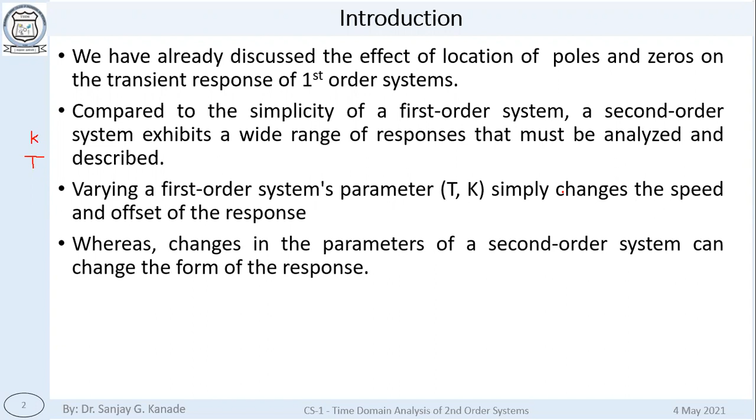But in case of second order system, it is much more complicated, and based on the values of those components of the second order system, it can exhibit a wide range of responses, and those need to be analyzed, and we are going to analyze those different types of responses. Okay. So this is basically what I have written on this slide, whatever I told you right now. Okay. So

sometimes you may find that even if the system is second order system, its output or the response looks like a first order system. Now that is dependent on, again, some of the values of the second order system, and those are some characteristic specialties of second order system, that the output may look like a first order system or some different type of output we may get from a second order system. Now

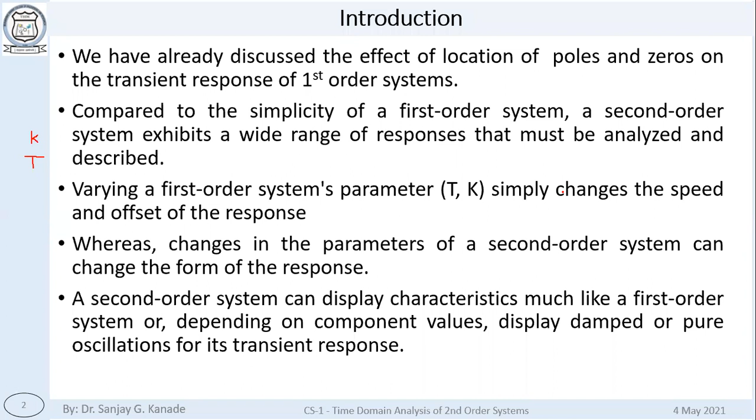tell me the transfer function or the equation of a second order system, then you should immediately tell this equation within fraction of seconds. Omega n square upon s square plus 2 zeta omega n s plus omega n square. Like this, you should be able to tell this equation immediately. Okay, omega n square upon s square plus 2 zeta omega n s plus omega n square. So this is the most important equation in the classical control system theory subject, control system 1. And you must remember this equation forever.

This will be required for your next year subject also. When you see control system 2, at that time also you will have to take cognizance of this equation. So don't think that this is the subject, once you pass it will be over. No, it is going to play a major role in all the system design calculations that you are going to perform. Okay. Now, can someone derive this equation from here?

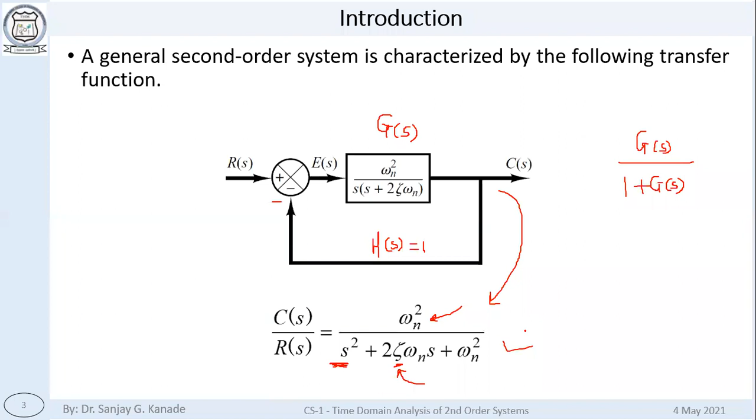Now, what are these omega n and zeta? S is obviously the Laplace domain variable, so that is not a question. There are two parameters in this equation. The first one is zeta and the second one is omega n. Omega n is the undamped natural frequency of the second order system, which is the frequency of oscillation of the system without damping.

Now, some of these things you may have studied in physics, about the natural frequency of oscillation. For example, you give a guitar string some vibrations and it will vibrate at a particular frequency. That is its natural frequency. And if you apply your fingers, you are damping it. So omega n is that undamped natural frequency of the second order system.

And the second parameter in the equation is zeta, which is called the damping ratio or damping factor of the second order system. It is the measure of degree of resistance to the change in the system output. These two values are going to play an important role in looking at the response of the second order system.

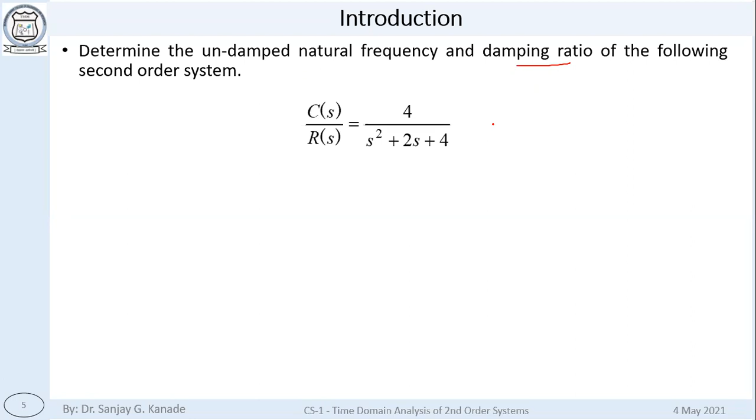Now, just for an example, we want to find out the undamped natural frequency and damping ratio. This example looks very simple, and it has already been asked in some question papers. Some of you may think why such a simple question is asked, but many students make mistakes while finding these values. Can you find out? You just have to compare the given equation with the standard equation. Now, how are you going to find it?

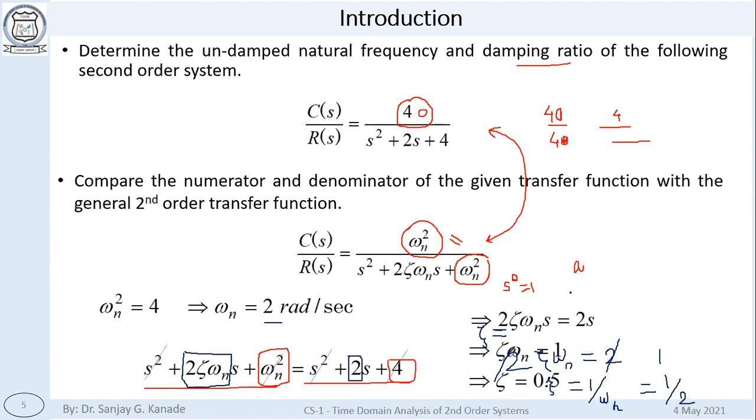So zeta omega n is equal to 1, and zeta is equal to 1 by omega n. And omega n is what? Omega n we have found out is equal to 2. So zeta is equal to 1 by 2. Okay, so you are right, Pramod. Zeta is equal to 1 by 2, so zeta is equal to 0.5. This is how you find out the values of omega n and zeta. Now where are the 2 poles? The system is a second order system, which means there are 2 poles in the system.

So how do we find out the poles of the system? This is the characteristic equation or the denominator polynomial. You just find out its roots. This is a second order system. So what is the formula for finding out roots of a second order polynomial? What is the formula for second order? Yes, anyone?

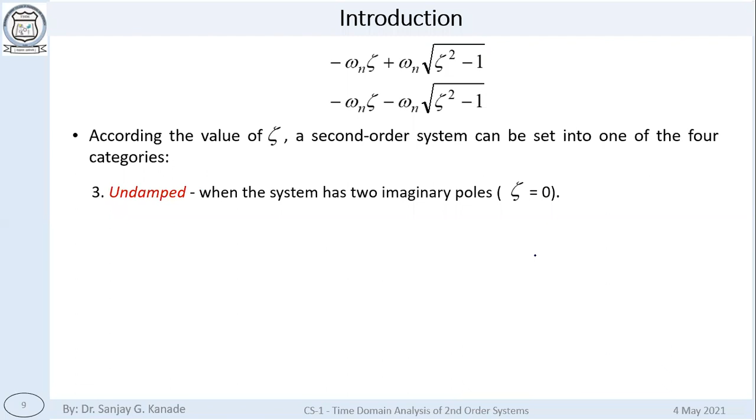Third category is undamped, when zeta is equal to 0. Now what is happening here? If zeta is 0, the real part is 0, right? Because this is omega n into zeta, so that is 0. So what remains is only plus or minus omega n, and the square root has only -1. Means two imaginary poles we will get, and those are on the imaginary axis. The two poles are on the imaginary axis when zeta is equal to 0.

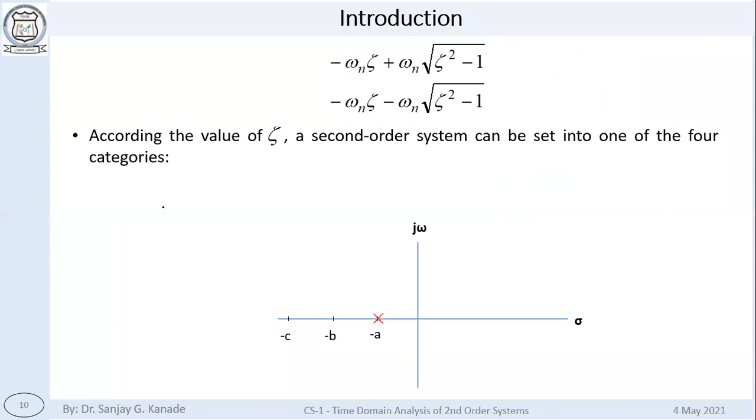And the fourth possibility is when zeta is equal to 1. What happens? When zeta is equal to 1, this becomes 0. Means only the real part remains, and that too equal. So there are two poles. Both are real and equal.

So repeated poles. So you can see here I have put two crosses here, quite overlapping crosses. And this kind of system is called a critically damped system. Critically damped system. Okay. So we will now stop here.

What we have seen today is there are 4 categories in which a second order system will be categorized based on the value of zeta. Okay. When zeta is equal to 1, critically damped. When zeta is equal to 0, undamped.

Okay, so let's resume our discussion on time domain analysis on second order systems. The second order system is the one where there are 2 poles, right? That we already know now. There are 2 poles in the system, and the general formula for the poles we have derived as this one. What is it based on? It is based on the general equation of the second order system.

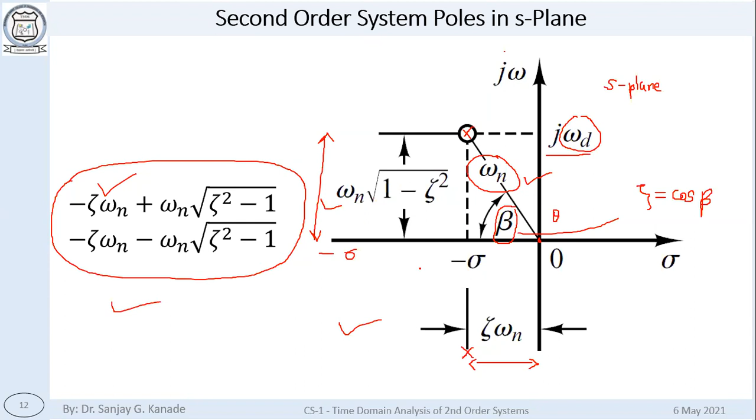Okay. Now, as we did for the first order system, we want to find out the step response of the second order system also. And in that, we are going to focus particularly on the underdamped system, because the underdamped system exhibits certain specific characteristics which are not possible to analyze for the other three types.

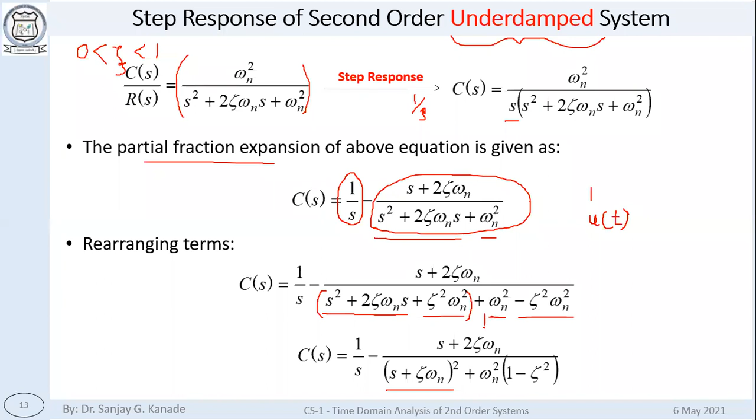This bracket becomes s plus zeta omega n squared plus omega n square taken common, and from here remains 1 minus zeta square. Okay. So this expression I have written again here. Okay. Now what? Now I am again writing instead of this expression, just to simplify my calculations a little bit, I have taken omega d.

This is actually not some randomly taken term. This is called damped natural frequency. Omega d is equal to omega n square root of 1 minus zeta square. Okay, this is called damped natural frequency. Now in our previous lecture we have seen zeta is equal to 0. What is that system called? It is called undamped, right? This is called undamped system.

So if you substitute here zeta is equal to 0, what we will get? Omega d will be in this case equal to omega n. Means what? We will get the undamped natural frequency. So it is the same thing now. You can relate this now. Why we call this undamped system? When zeta is equal to 0, we call that undamped system.

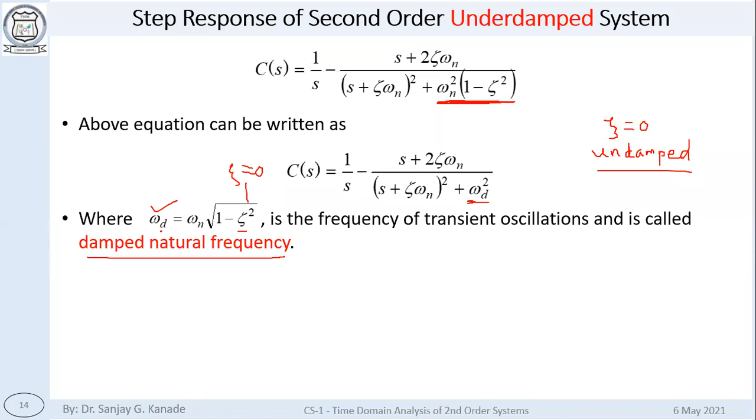Okay. So here it is. With zeta having some value, we get omega d, which is damped natural frequency, and its value is equal to omega n square root 1 minus zeta square. Now, for the inverse Laplace transform, we can in this case split this term.

You can see here it was 2 zeta omega n. So I have taken 1 zeta omega n here and 1 zeta omega n here. Okay, nothing extravagant. It is quite simple that I have done here. S plus zeta omega n

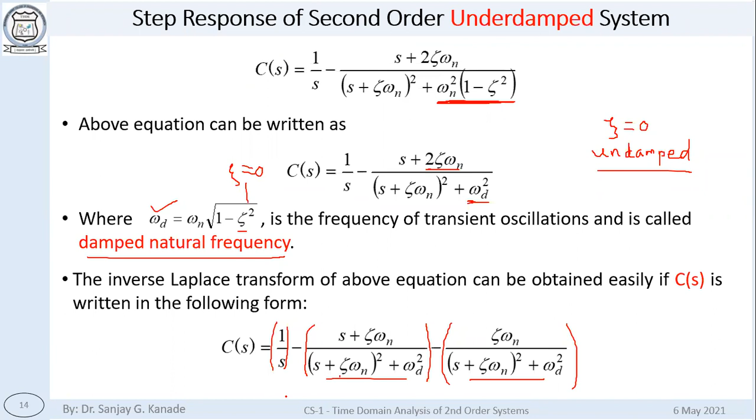Denominator is same for both the terms. Now here you can see that this expression as well as this first expression, all these three are now in some form of Laplace transform pairs. There are certain forms which we can now use for Laplace transform inversing. Which formula we can use? I will come to that a little later. Just a little more rearrangement is required for the same thing.

And now we have exactly some expressions where we have Laplace transform pairs. Which pairs? You can go through this slide which I have shared with you in the morning also.

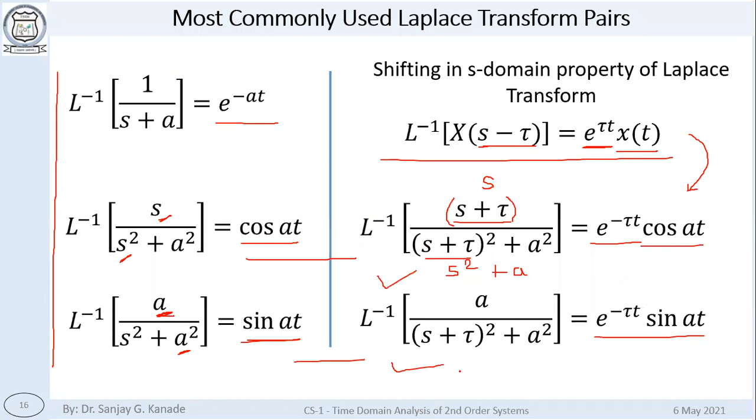Now you can see that these terms 1 and 2 are the terms we have in our equation. S plus zeta omega n upon (s plus zeta omega n) squared plus omega d squared. So here we are going to get a cos term. Cos of what? Cos of at. What is a in this case? Omega d. And because of this shifting it will get multiplied by e raised to minus zeta omega n t.

So this is what we get now: e raised to minus zeta omega n t cos of omega d t, and similarly for sine also. So we have got our expression for step response of second order underdamped system. From both these terms we can take this common. This makes things a little bit easier, not really necessary. And again the special case, zeta equal to 0 means an undamped system. So what will happen to this whole term? Zeta is equal to 0, so this term becomes 1.

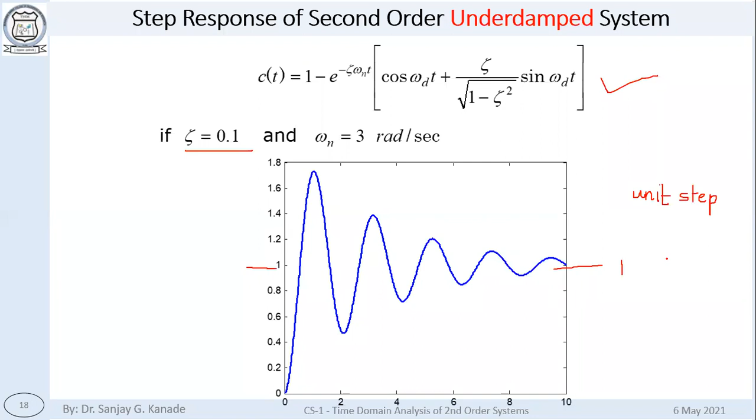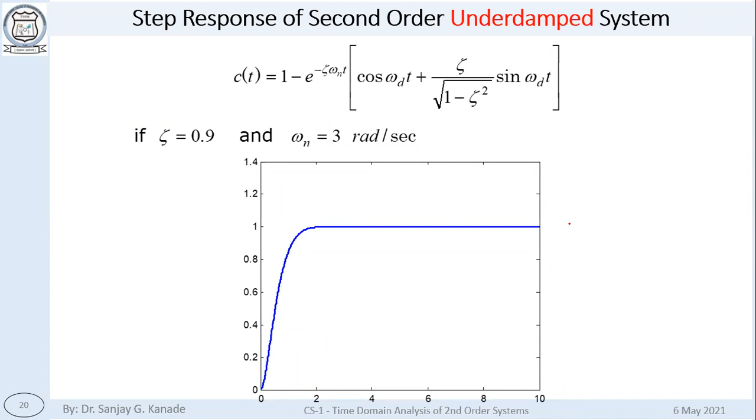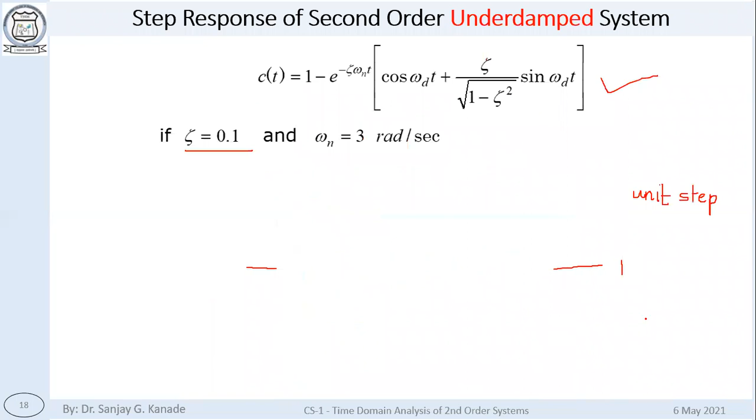There is no damping, no reduction in oscillations. The oscillations will continue forever, just like that. The oscillations are not going to decrease. Why so? Because you have seen the expression also. See, what was the expression for zeta is equal to 0? See here, 1 minus cos omega n t.

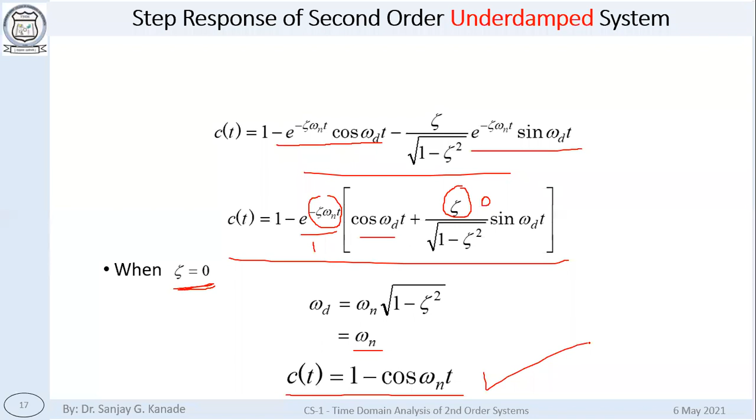So it is a pure sinusoidal wave, 1 minus cos omega n t. There is no decaying factor there, right? 1 minus cos omega n t. It is a pure sinusoidal wave. That's why we get the output as pure sinusoidal when zeta is equal to 0.

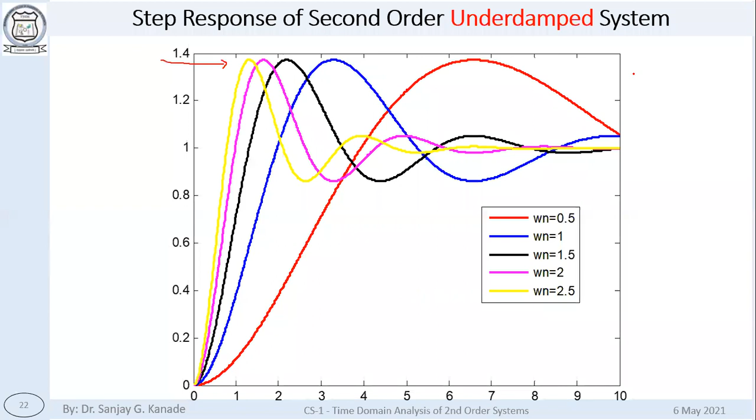If we keep zeta constant and we change only the frequency, then what happens? You can see the overshoots are the same, the highest values of the response are same. What has changed is the frequency, because we are changing frequency basically, so we can see that the frequency has now changed. What do you mean by frequency?

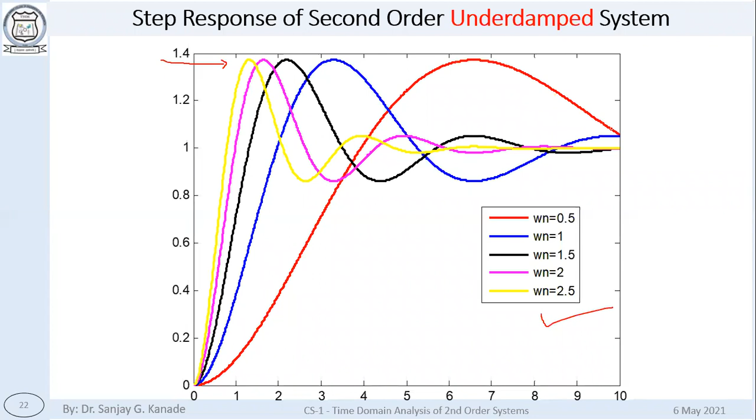This time period of the signal wave changes means frequency is changing. The time period is increasing means frequency is decreasing. Okay,

now we are going to move to one of the most important topics again, the time domain specifications. If you have any questions, you can raise them, by the way. There are a lot of things you have to pay attention to. Again, this diagram is very important, and this question has been asked a lot of times in your exams, so I suggest that you draw this diagram in your notebook and keep it with you all the time.

So whenever we talk about the time domain specifications, we always take a unit step input and give it to a second order system, and for such a system zeta is between 0 and 1, meaning it is an underdamped system. Omega n is greater than 0, meaning the frequency is greater than 0, and for that, as we saw in some of our earlier slides, the response is in this manner.

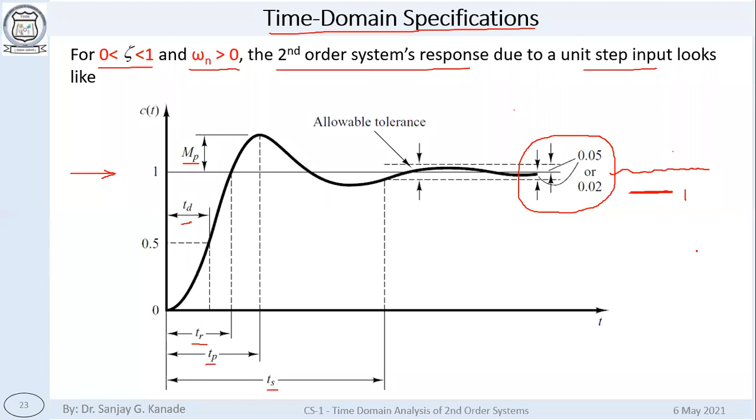So the first term is TD. TD is called delay time. Now what could it be? It is the delay, how much delay there is, right? The definition of delay time is the time required for the response to reach half of the final value for the very first time.

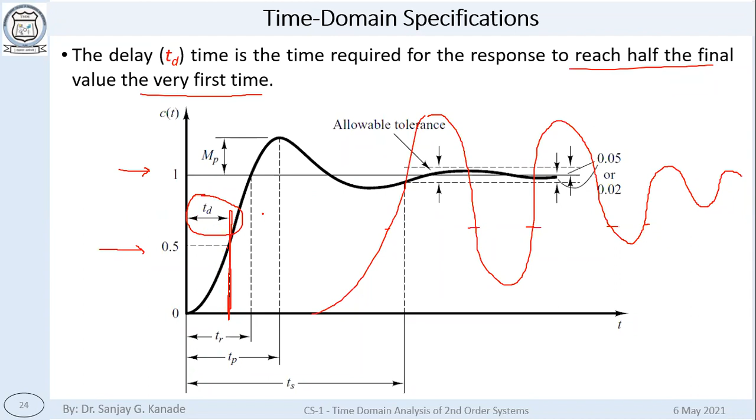Now the next time domain specification is rise time. The rise time is the time required for the response to rise from 10% to 90%, or 5% to 95%, or 0 to 100% of its value. For an underdamped system, 0 to 100% rise time is taken. For an overdamped system, 10 to 90% rise time is commonly used. Since we are talking about the diagram for an underdamped system,

rise time here is the time required for the response to rise from 0 to 100% of the final value for the first time. Again, only when it reaches for the first time. So this is TR, rise time. The 100% value is here.

Then the next time domain specification is peak time. Peak time is the time required for the response to reach the first peak of the overshoot. Again, first peak. As in the diagram I just showed, there can be multiple peaks. What is a peak? The tip, the higher values. So there can be multiple peaks. So which one do we have to take for peak time?

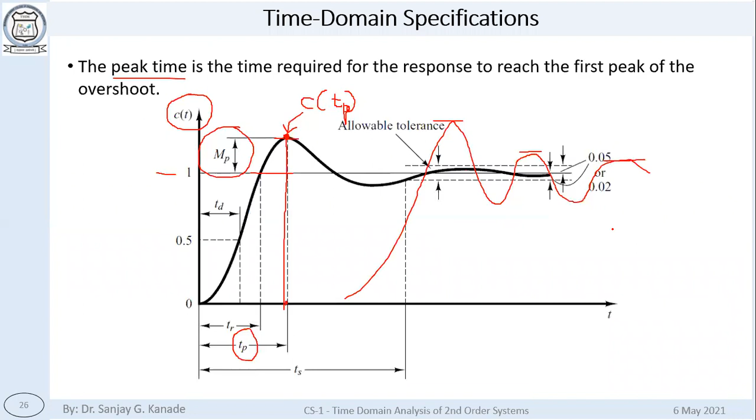This overshoot is particularly important for talking about the stability of the system. Okay. So I hope all of you have noted down these definitions of time domain specifications: tr, td, tp, Mp, and ts. ts is what? The settling time. It is the time required for the system to reach within the allowable tolerance and remain there.

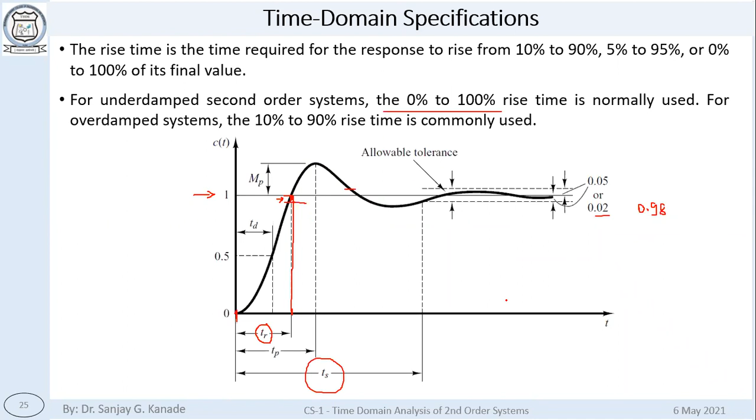But this is not the time, because from here it has gone up, then again gone down like this. So we don't want that. What we want is that the response goes and remains in the allowable tolerance. Only then we call it the settling time. Okay. So these are the time domain specifications.

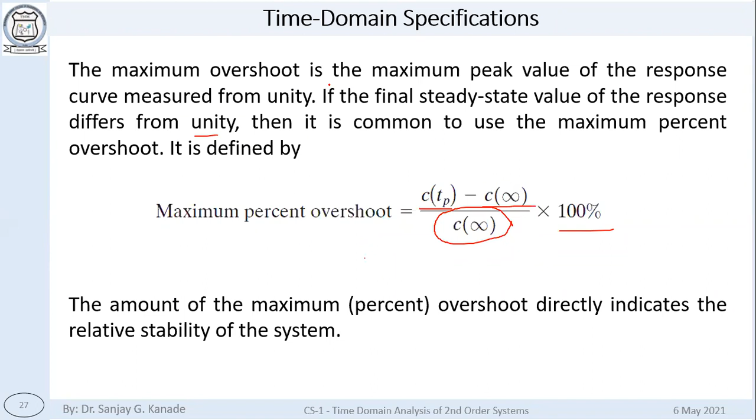Okay. Any questions regarding what we have seen today? We have seen two most important things today: the derivation of the step response of the second order underdamped system, and the time domain specifications. Both these topics are extremely important from a university question point of view. Direct questions are asked. Many of the questions are based on that. So you must keep this with you all the time. Okay.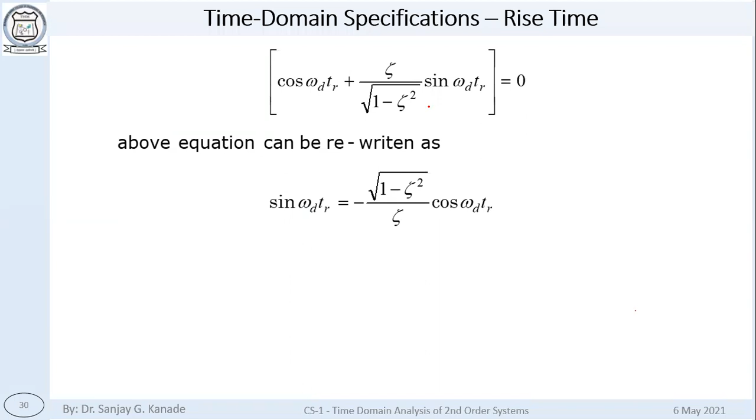Here sine omega d tr is equal to minus, this goes on that side, square root of 1 minus zeta square upon zeta cos omega d tr. And then if we can see, tan omega d tr is equal to minus square root of 1 minus zeta square upon zeta. Okay.

Tan inverse of this term is actually pi minus theta, where theta is equal to this angle. Okay, and how will you calculate the value of theta in general? I told you that zeta is equal to cos of theta, so theta will be cos inverse of zeta. So that's how we can calculate the value of theta, and from there we can calculate the value of tr. So this is the expression now for tr, which is the rise time of the second order underdamped system.

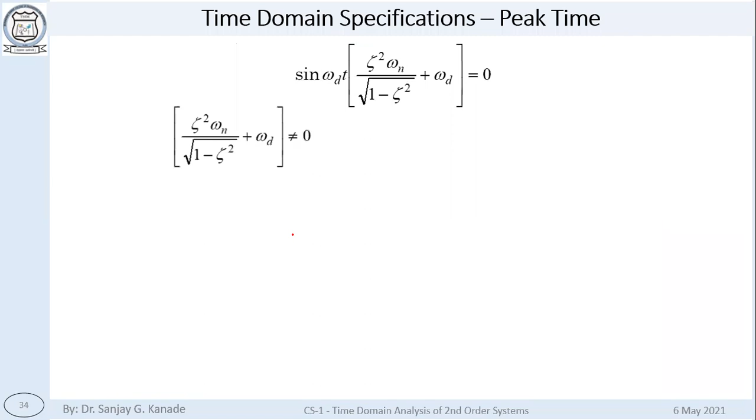That is how we calculate the maxima of a curve, any curve. We can calculate the maximum by finding out its derivative and equating it to 0. Okay. Now I'm going to skip these steps. You can find these steps in the PPT available there. And finally, after rearrangements and recalculations, what we get is Tp is equal to pi upon omega d. Tp, that is the peak time, is equal to pi upon omega d.

Okay, there are some more derivations. Why I'm skipping these is these are not generally asked, and anyway these are available in the books as well as in the PPTs on Moodle. So you can refer there, whatever suits you. Now I'm going to just go forward and give you the final summary, which is actually required for solving the problems.

And now I will come to some very interesting and important concept here. Hello, yes.

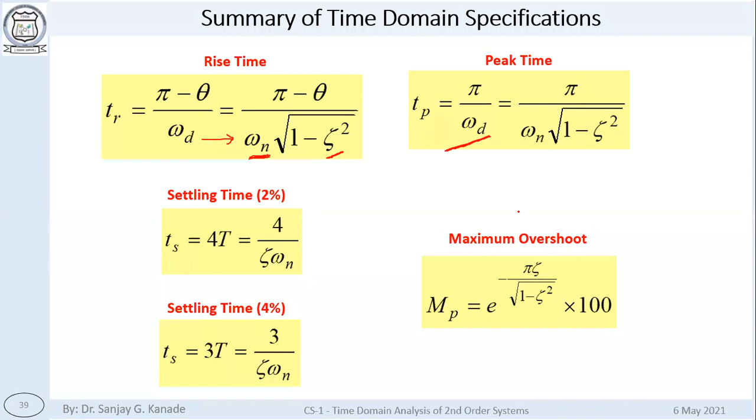If you are going to refer some books, then you should ideally refer Nagrath Gopal only.